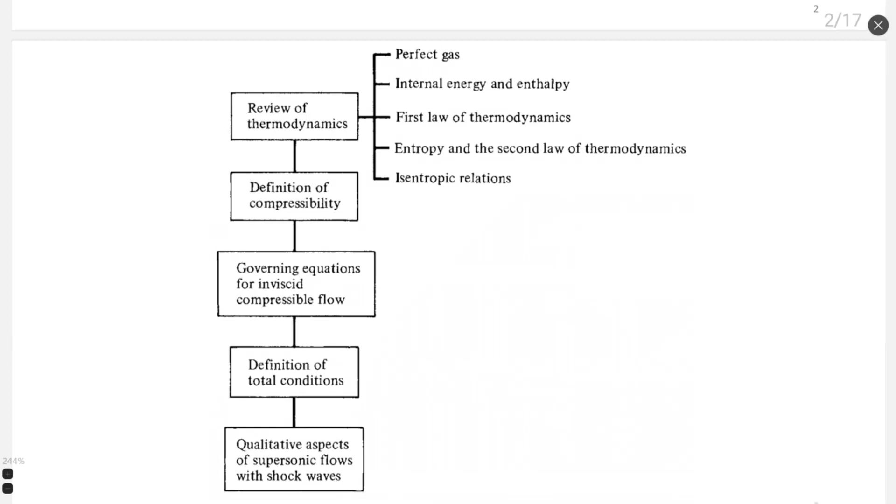Chapter 7 has this structure, as I show you on my screen: a review of thermodynamic properties, talking about perfect gas, internal energy and enthalpy, first law of thermodynamics, entropy, second law of thermodynamics, and isentropic relations. Usually I skip this part since it's part of your previous studies in other disciplines like transport phenomena and fluid mechanics. I will just give you a few very important relations which we will constantly use in our lectures, studies, and calculations.

Then will be a definition of compressibility, which is the classical definition. Then we talk about the definition of total or stagnation conditions for compressible flow, and then some qualitative aspects of supersonic flows with shock waves. We give a preliminary introduction to what shock waves are, which processes happen at these shock waves, and the different types of shock waves.

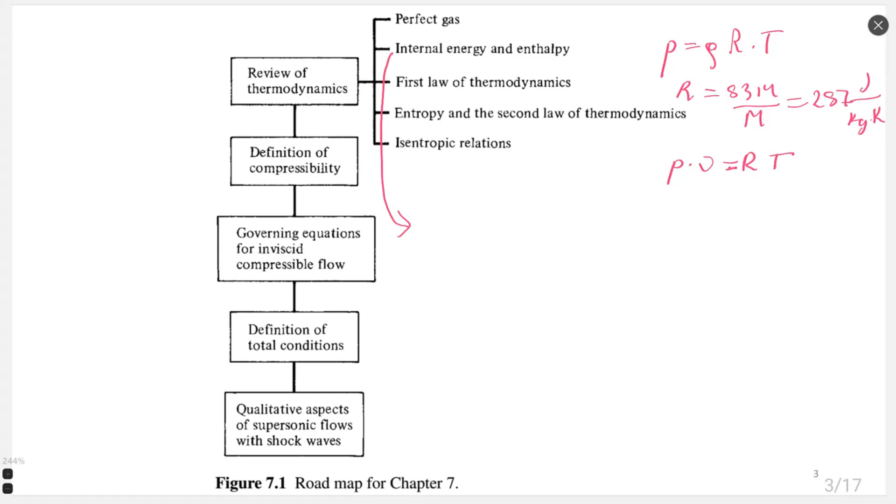This is about perfect gas, the most important thing, but you probably already knew it. Then for internal energy and enthalpy, we use the definition of internal energy: internal energy E equals Cv multiplied by T, where Cv is the specific heat of the gas at constant volume, and T is temperature. Enthalpy H is very similar, but it's Cp multiplied by T, where Cp is the specific heat at constant pressure multiplied by the temperature. So these are the two parameters we are using.

Between Cp and Cv, we also have a relation. I hope you remember, but if not, I'll remind you: Cp is always bigger, and Cp minus Cv equals the gas constant R. There is also another relation to the adiabatic coefficient.

Cp divided by Cv is gamma, the adiabatic coefficient. For air, this adiabatic coefficient equals 1.4. This is constant for low temperatures, until approximately 1500 Kelvin. After 1500 Kelvin, when we usually start to have processes of dissociation, recombination, or hypersonic flow, this gamma starts to change, and change significantly. We will discuss this question in one of the following chapters when we talk about hypersonic flow.

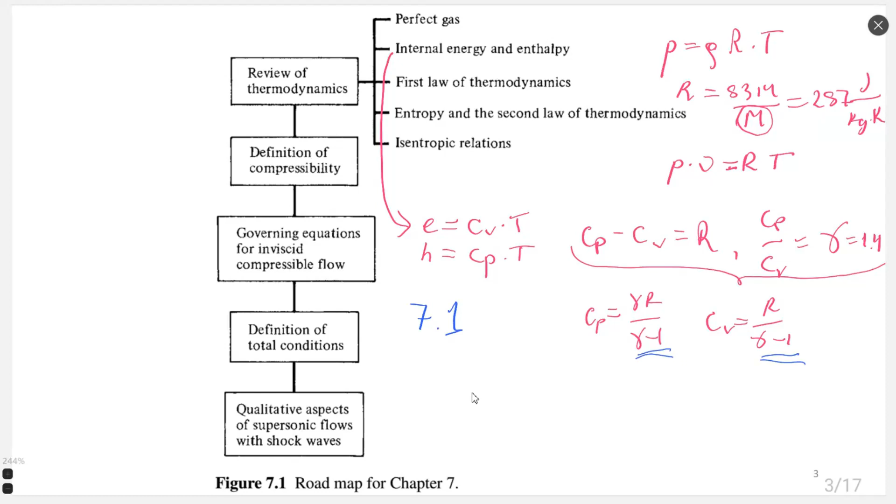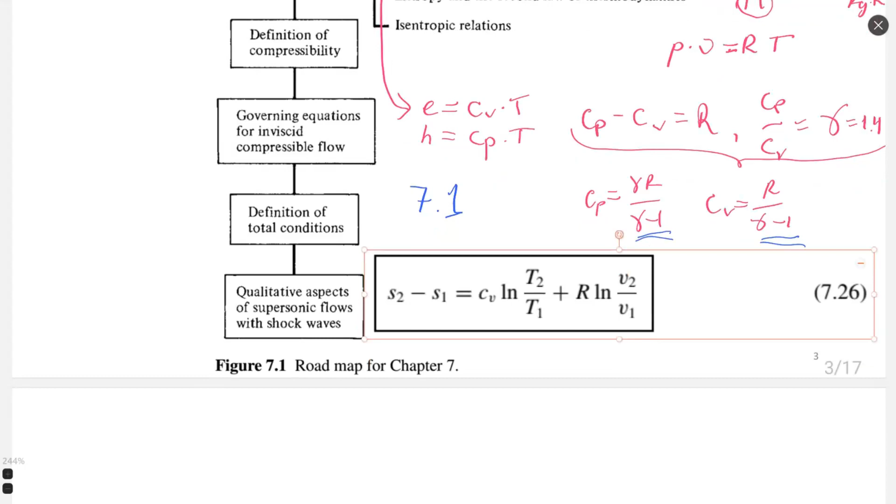I will show you this equation right now. This equation right here. Okay, I hope it is visible. I think some pictures or equations I will just drop on the screen because it's much simpler to do it this way than to write long relations, and then we can discuss other things.

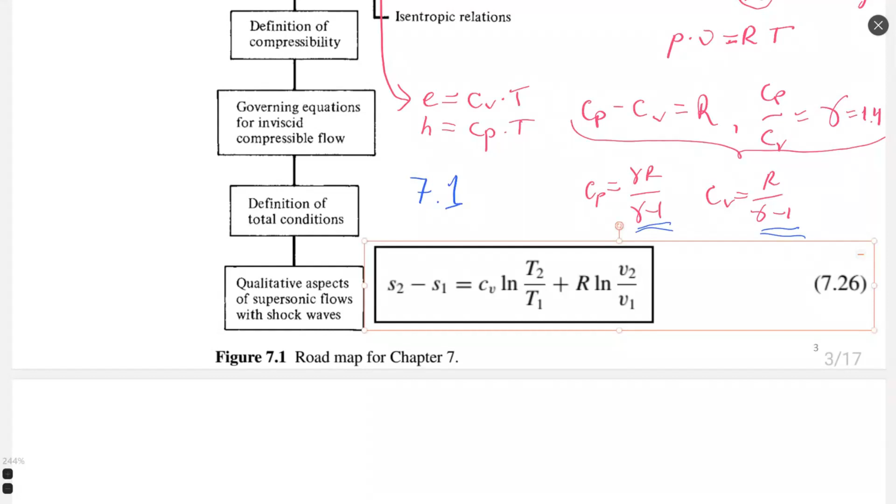As a consequence of isentropic relations, we have ratios between different thermodynamic properties inside the gas. I hope you know the main isentropic relation.

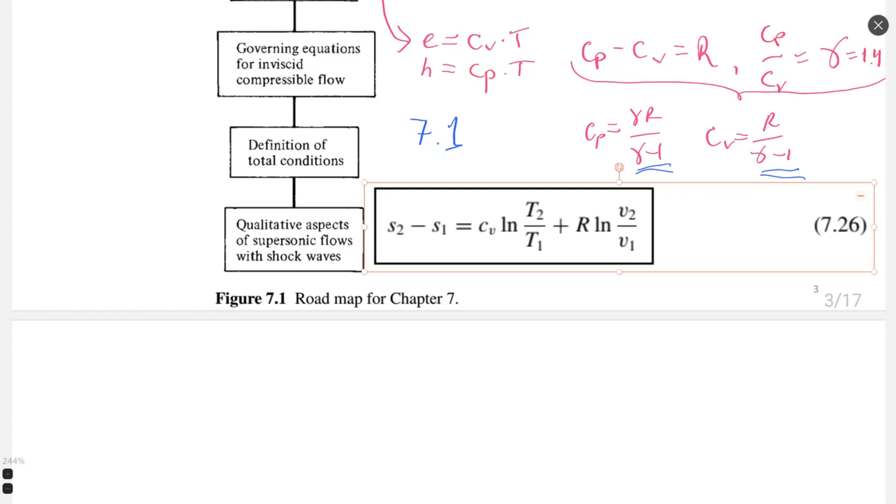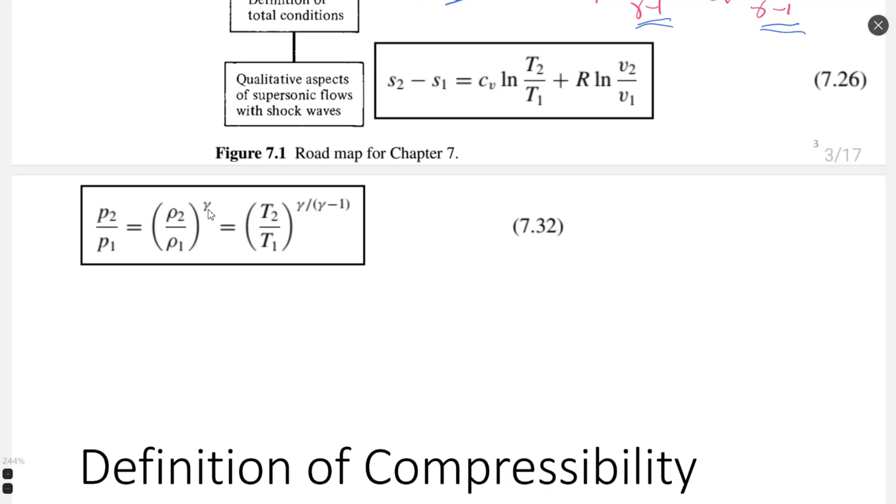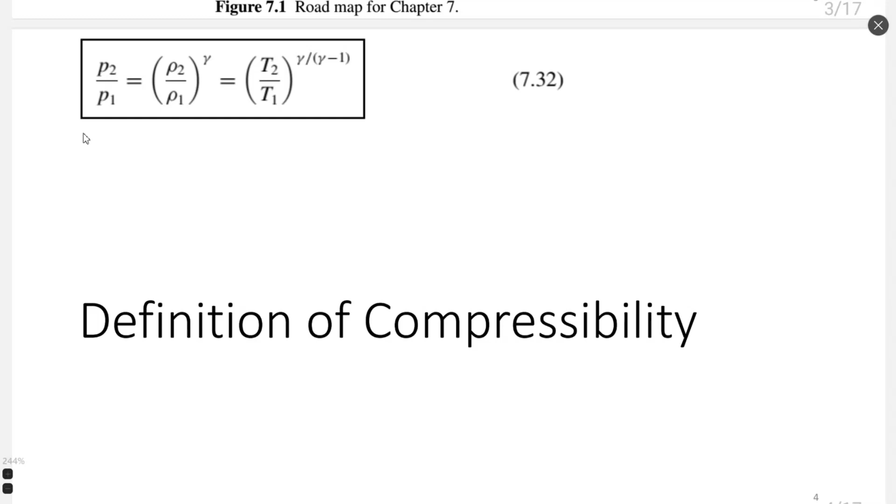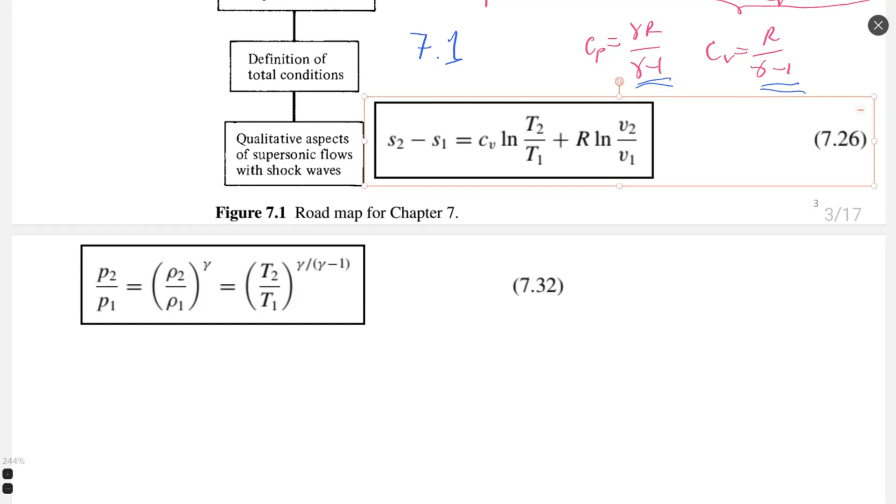Okay, probably before the definition of compressibility, I will put it right here. This relation corresponds to equation 7.32, which talks about the change of thermodynamic properties at different points inside an isentropic flow. Isentropic flow is a flow which has zero change of entropy. This is the formula which gives us the change of entropy, equation 7.26, and if this is zero, then isentropic relations start to work.

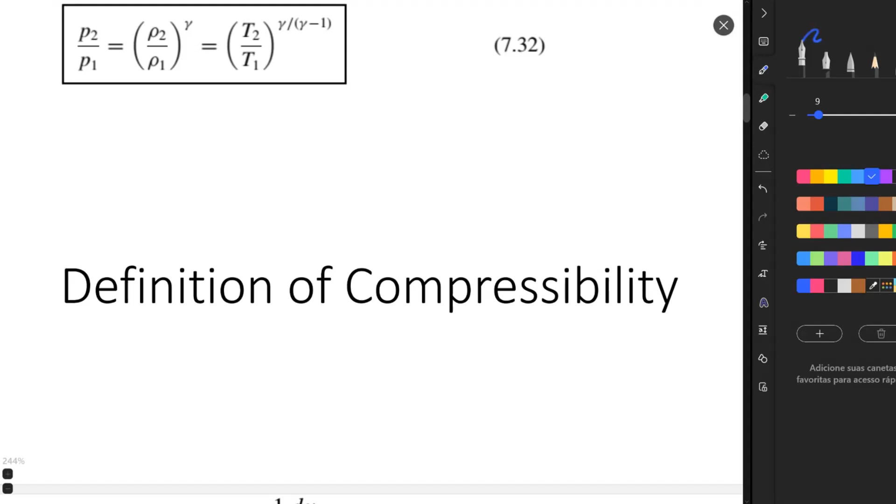It says that at two different points, for example, the ratio of pressure would be equal to the ratio of densities raised to the power of gamma, or equal to the ratio of temperatures raised to the power of gamma divided by gamma minus 1.

Also, we may find here this gamma minus 1 is present, so this ratio is always positive. And look what we also can find from this relation. Probably you already know that since pressure 2 is bigger than pressure 1, it means density 2 will be also bigger than density 1, and temperature 2 will be bigger than temperature 1. So all thermodynamic parameters usually change in the same direction inside isentropic flow.

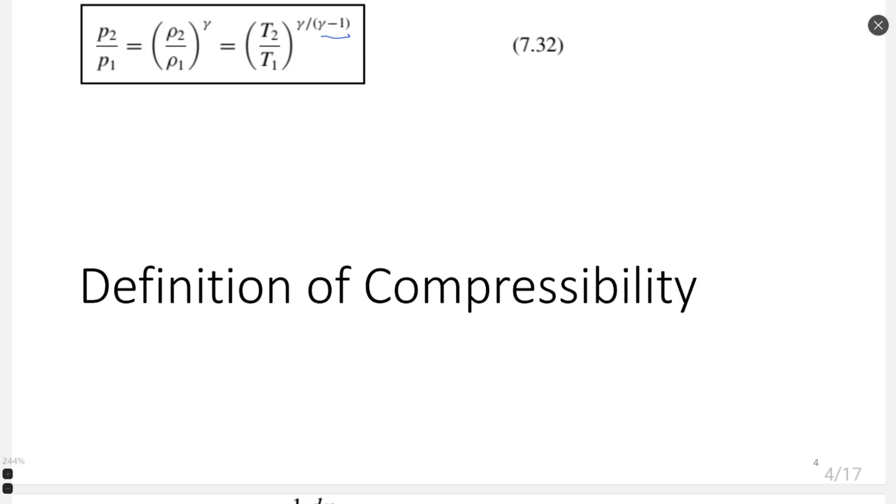We will see this soon when we talk about flow in the nozzle and calculation of the flow in the nozzle. There you will see similar changes of pressure, density and temperature inside the nozzle, which is quite important to understand from the beginning before we start the nozzle section.

Examples 7.4 and 7.5 give us another possibility to calculate change of thermodynamic properties according to the relation I just showed you. I think you can check those.

And the main definition of compressibility is shown on this screen. Definition of compressibility is very important, and as I already told you, for fast flows, the coefficient of compressibility is called tau, which is reverse proportional to the specific volume and proportional to the derivative of specific volume by pressure.

This compressibility coefficient can be defined for the arbitrary case as shown in equation 733, or defined for isothermal process as the isothermal compressibility coefficient, tau T, or even calculated as the isentropic compressibility coefficient, tau S. In the first case, we have the partial derivative of specific volume by pressure at constant temperature, and for the second case, specific volume derivative by pressure at constant entropy.

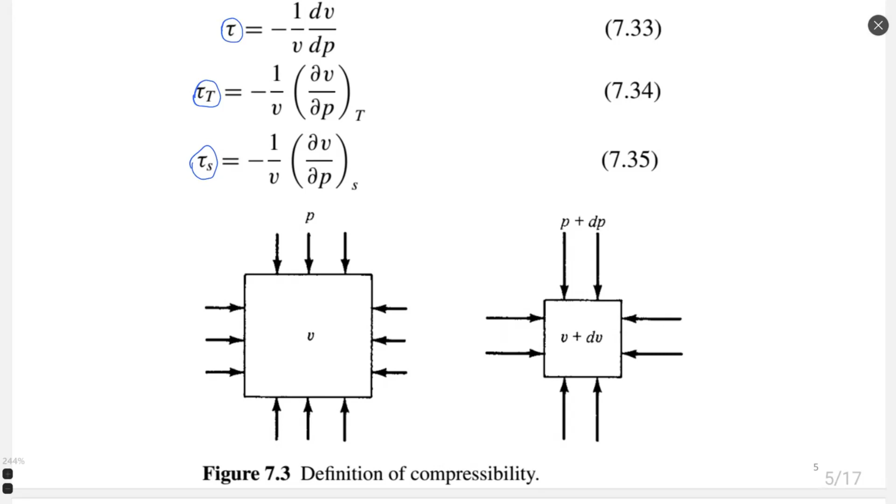So the schematic at figure 7.3 shows change of the volume and change of the pressure, because change of the volume can be caused only by change of pressure.

Another formula you may find in the book is mainly a transformation equation. 737 is a reorganization if we would like to obtain the differential of density as a function of density, the compressibility coefficient, and the differential of pressure. It's just a rearrangement of equation 36.

And another equation we may see is the definition of Mach number, which is velocity divided by the speed of sound. Why we actually use the definition of Mach number, we will see very soon. For us, Mach number, or the relative velocity of the flow to the speed of sound, characterizes the kinetic energy of the flow.

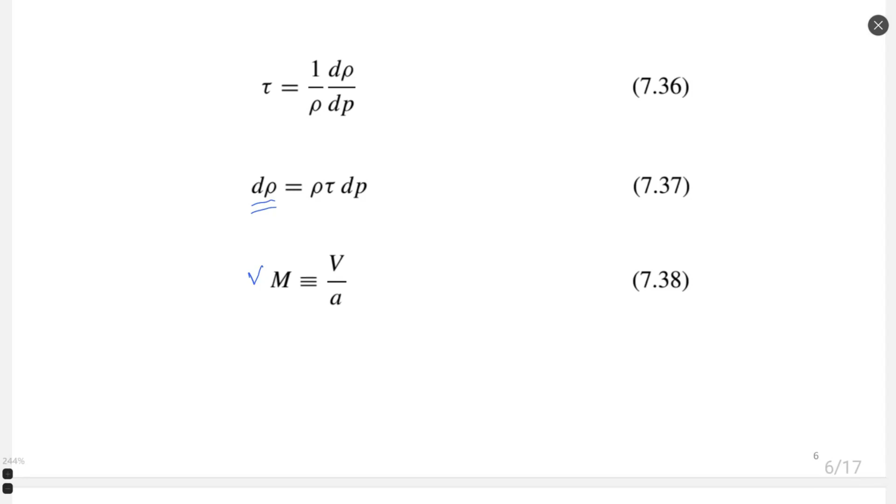Till now I see no questions, so I can proceed to the equations for inviscid compressible flow. These equations you saw many times. Probably I will stop on some aspects which we are discussing in following chapters.

I would like to remind you that Anderson already presented the general equations of flow in the book, and you also studied these equations in other books, right? They are typical flow equations that can also be called the Euler equation system or Euler equations.

And these equations do not have a viscous part, so they are inviscid equations. These equations have the time part, the time derivative, so they are transient equations, not stationary. So something we preserve.

Equations of the flow can be written in general in two different forms: integral form, like equation 39, and derivative form, which is equation 40. What is the difference between them? It is how we try to calculate the flow process.

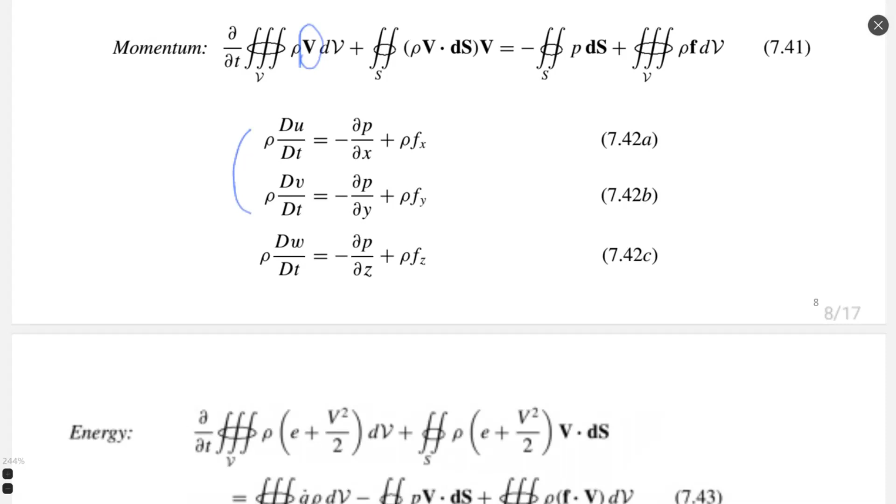The energy equation is the most complex equation among all flow equations because it uses the definition of energy, and energy is not defined as one parameter. Energy can be kept inside kinetic part and potential part. The kinetic part is hidden inside velocity, so we can see it in several parts of this equation. The potential part of energy is hidden inside the temperature, and we also can see internal energy in different parts of this equation.

The idea of the energy equation is similar to the previous equations. It says that energy does not go anywhere and does not appear from anywhere. Energy only transforms from one form to another. Here we have a global energy balance in time, change of energy in time inside the control volume, and here we have how energy flows through the surface of the control volume.

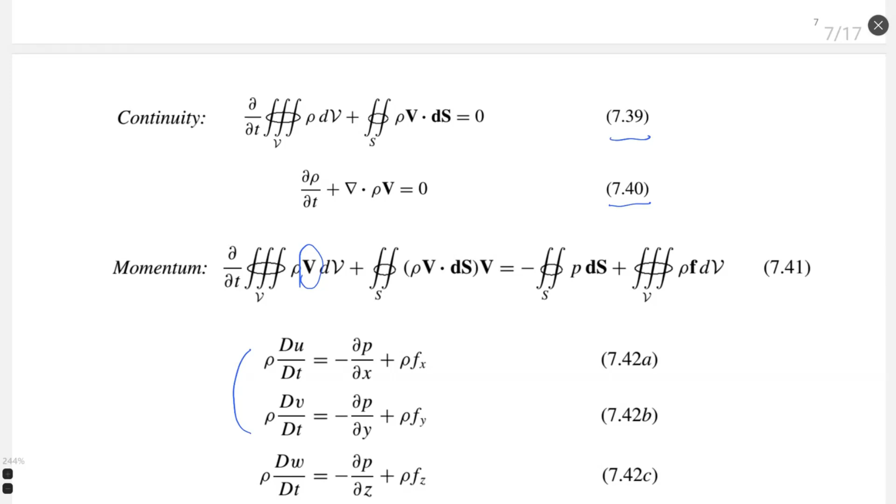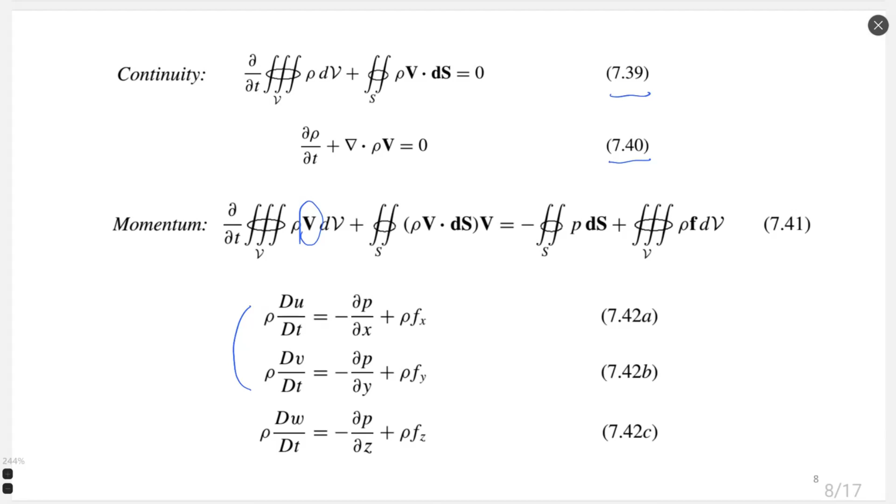Let's see, we had three equations, right? The continuity equation, which has inside it density and velocity, two parameters. The momentum equation has density, velocity, but also pressure, already a third parameter. So with two equations we already have three independent parameters. The energy equation has, despite density, velocity, and pressure, internal energy, and inside this internal energy is temperature. So many parameters, more than the number of equations.

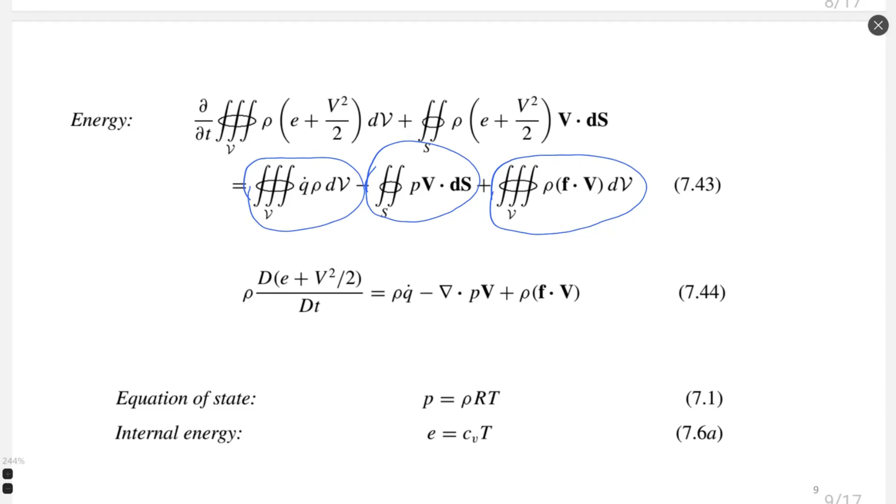This is why, to close the equation system, to complete the equation system, we need two more additional equations: the equation of state and the internal energy equation. In such a way, the number of unknowns is equal to the number of equations, and this equation system can be solved. It's quite important for us, for applied science like gas dynamics, to have an equation system which can be solved, which we need to solve.

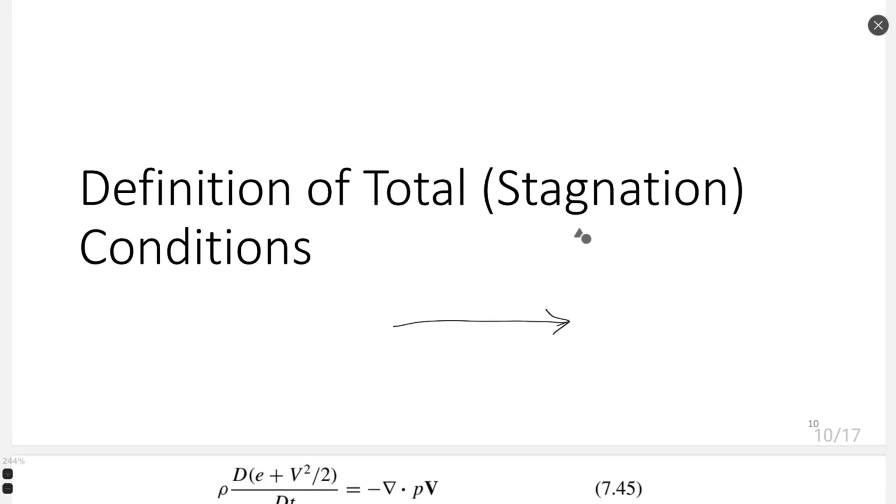But if we have a flow, at some point there will be a wall, and on this wall, flow will stop. What will happen in the real case is the following: flow will go in two different directions, but at the very central point, the flow will stop. So when we had V infinity here, at this point, we will have V equal to 0. Velocity will be 0. Flow will not move. All the kinetic energy from infinite distance will transform to potential energy.

It's very important to us to calculate properties at this specific point where flow is stopped. It is not only to know how big would be the pressure, density, and temperature. There are even examples when flow does not stop, we will see them, for example, inside the nozzle or inside the diffuser. Flow doesn't stop, but we need to calculate stagnation conditions because stagnation properties are characteristic properties of one or another structure. Even by definition of stagnation parameters, we can calculate efficiency of one or another structure. So let's see this question precisely.

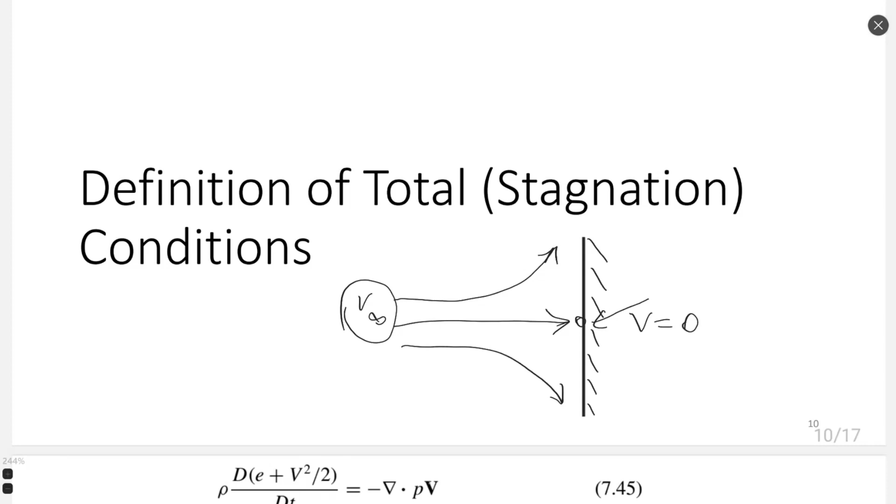How to calculate stagnation conditions? We need to see again our energy equation 45, and inside this equation we will rewrite the right part on the pressure contribution. According to the formula which gives us the derivative of a complex function, we can see that the derivative of the product of pressure and velocity would be this relation. Then we go back to our energy equation, make some transformations, and obtain a very important relation.

For the flow, this sum of enthalpy and velocity squared divided by 2 would be constant. Constant because the right part of the equation is 0. So inside the derivative, we need to also have the derivative equal to 0, meaning inside the derivative we have a constant parameter. To remind you, this part here is enthalpy: internal energy plus pressure divided by density is equal to enthalpy.

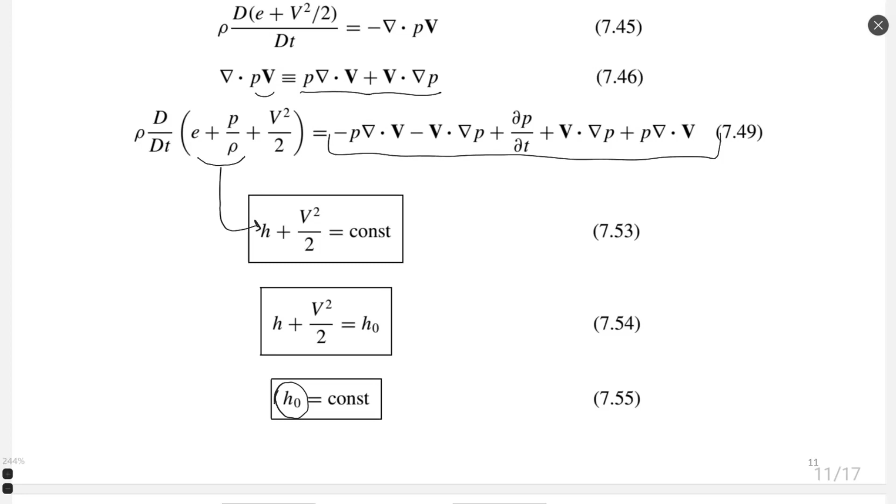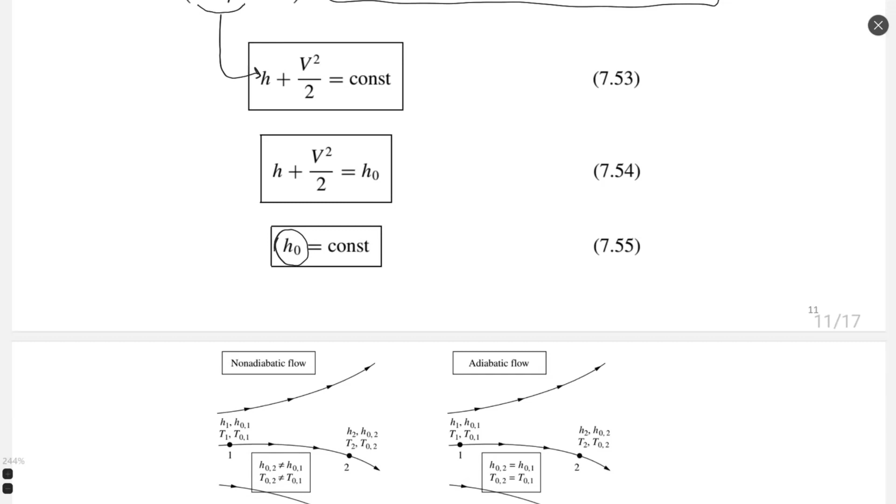We call this constant the stagnation enthalpy. So the stagnation enthalpy is constant for isentropic flow. It may be not only isentropic flow. This is the main parameter, or property of the flow, we will use to estimate stagnation conditions. So we are looking at the stopped flow as a flow with constant enthalpy, which is the maximum possible enthalpy for the system.

We may find 4 different types of flows, as you already know. They are non-adiabatic flow, when we have processes that account for heat transfer with the wall or with some external bodies, or adiabatic flow, the second case, where we assume that inside our flow we do not have heat exchange with external bodies or bodies inside our system. In such a case, stagnation enthalpy is preserved.

Since stagnation enthalpy is proportional to stagnation temperature, just to remind you, enthalpy was given previously as Cp multiplied by T. So if I write 0 right here, and then I can write 0 right here, nothing changes, because Cp is constant. It means that if for some adiabatic flow the enthalpy does not change, then stagnation enthalpy does not change, and stagnation temperature also stays constant. This is a very nice observation that helps us use different forms of energy equations, which we will see soon.

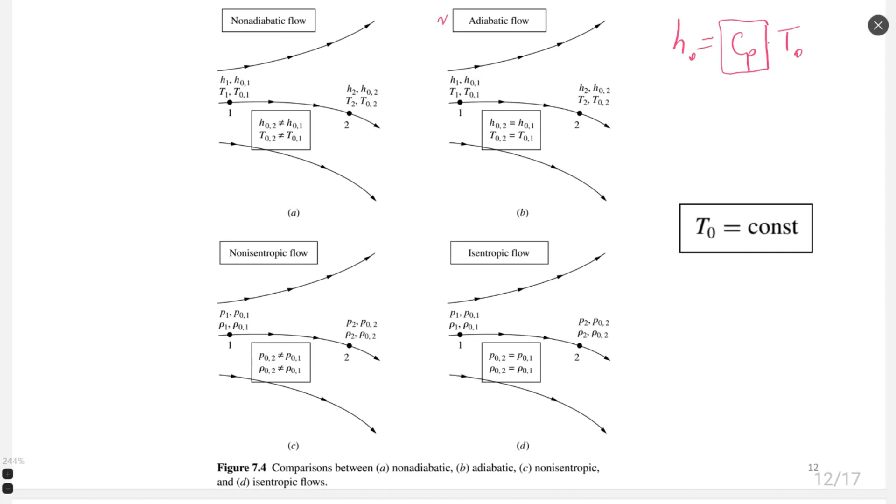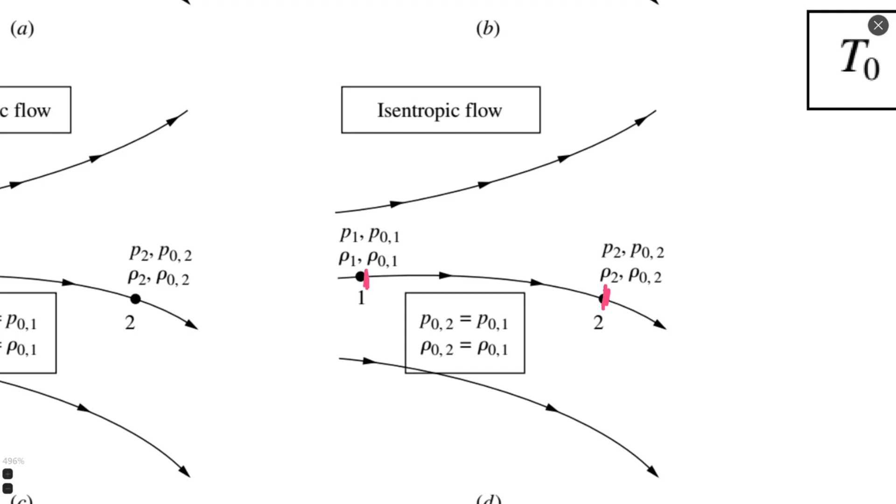What is stagnation pressure? Stagnation pressure is the pressure which we have when the flow stops. So if we stop the flow at point 1, we receive some stagnation pressure. If we stop the flow at point 2, we receive another stagnation pressure. For isentropic flow, these two stagnation pressures will be the same, and also the stagnation densities will be the same. Stagnation density is the density that happens when flow stops. So we have stagnation pressure, stagnation density, stagnation temperature, and stagnation enthalpy. This word 'stagnation' can be written in front of any thermodynamic parameter.

And the opposite is non-isentropic flow, where we have irreversible flow. In this case, unfortunately, stagnation pressure cannot be conserved, stagnation density cannot be conserved, and this is one of the questions to be solved inside theory of normal and oblique shock waves.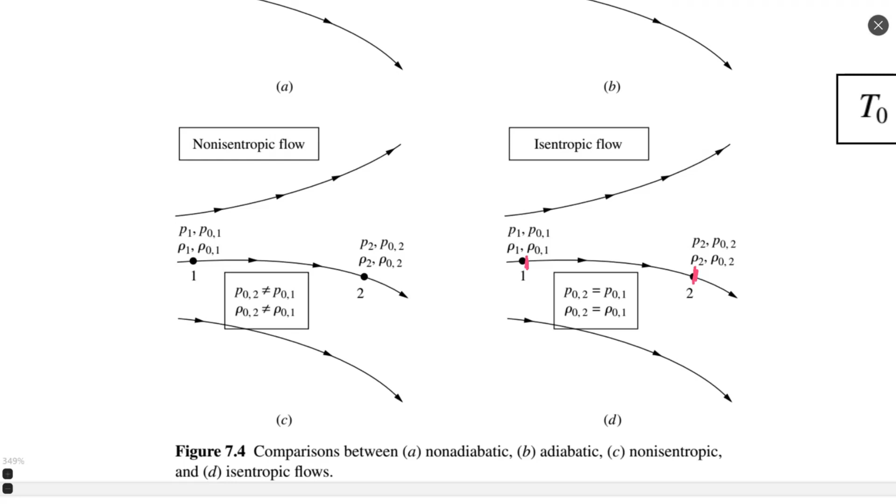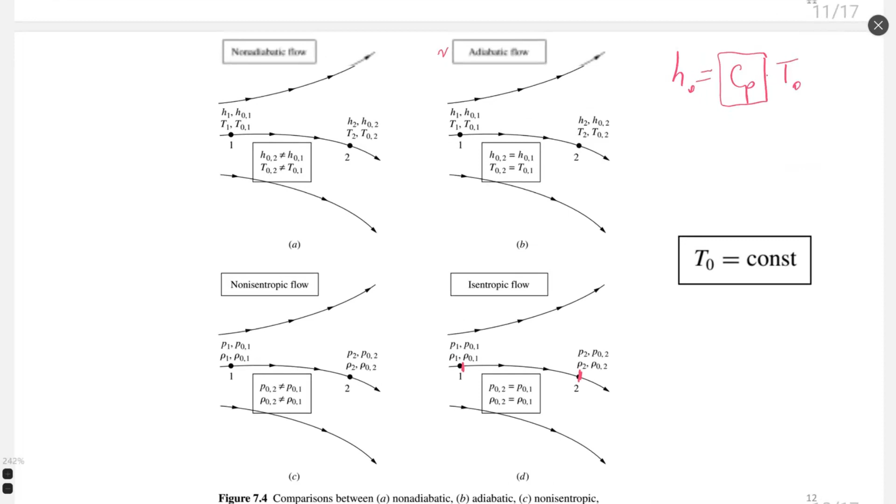It's solved analytically, and also in case of hypersonic flows, unfortunately it cannot be solved analytically—it can be solved only experimentally or numerically, with big difficulties. So this is a revision of 4 main types of flows.

Of course, from point of view of calculation, it's always favorable or more interesting for us to have isentropic flow, because it allows us to calculate quite easily almost any type of geometry of the flow. In some cases, adiabatic flows are very nice because with the assumption that we have no heat transfer, the model is not so complicated.

As I already told you, non-isentropic flow is probably the most difficult from a computational point of view in some cases, but in some cases, as we will see, an analytical solution can be obtained, and we will use it particularly inside work 1.

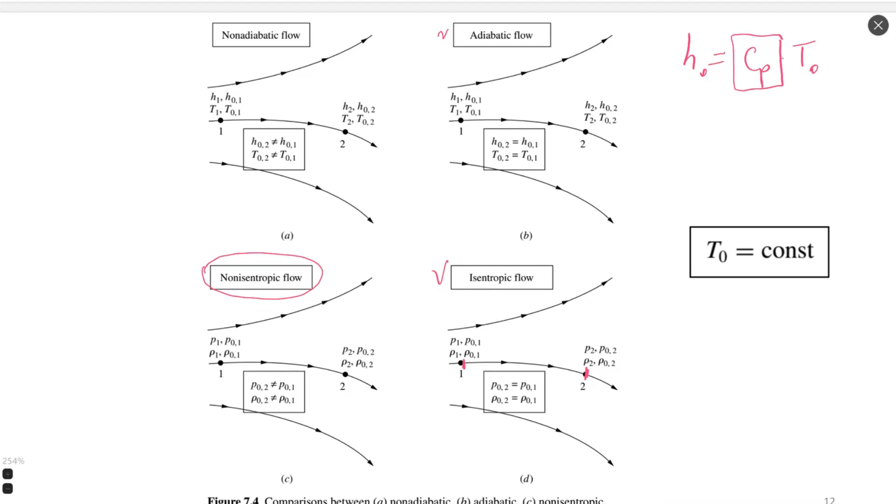Okay, I do not see any questions for now, and I think we can proceed.

Inside example 7.6, you may find how to calculate total temperature from other known parameters of the flow. This question we will also touch on in the next discussions, because when we see the algebraic equations for isentropic flow, then we will talk about such calculations.

So we will not miss this equation, example 7.6 and 7.7. We will still return to this question, and I will show you how you can easily calculate isentropic parameters or stagnation parameters.

The last part of chapter 7 is aspects of supersonic flow and shock waves. Just a moment, let me take a look if I did not miss anything. No, looks like we discussed all that is required. Chapter 7 is quite short, and we will finish today. Next time, we will start already chapter 8.

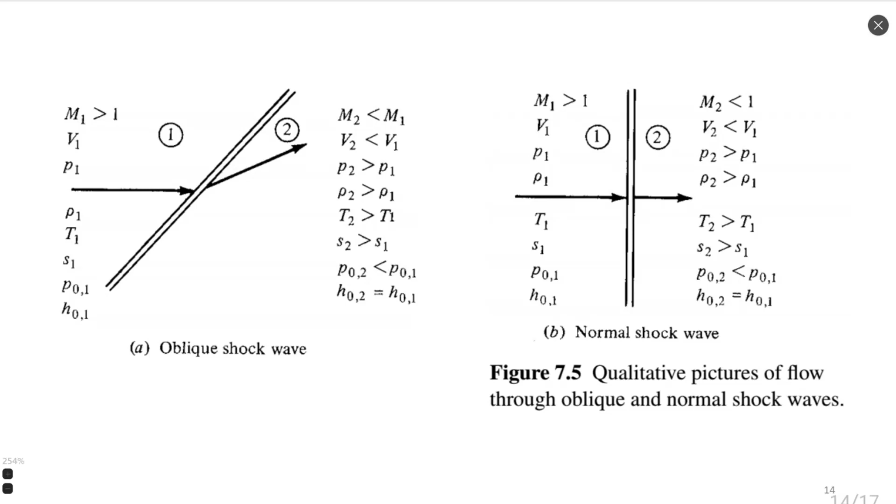Let's see—oblique shock wave is usually generated when we have a body not normal to the flow. For example, we have some thin shaped body. I will try to draw it, probably like this. Okay, we have a body, something like this. Some aerodynamic supersonic flow requires sharp edges. For example, we have this kind of airfoil, quite exaggerated in thickness, just to show you that a sharp edge generates the oblique shock wave.

Oblique shock wave is a shock wave which is not perpendicular to the flow. Normal shock wave is a shock wave which is perpendicular to the flow. Normal shock wave can be generated when the surface of the body is also normal—for example, we have some spherical or semi-spherical object with the surface quite normal to the flow. So this normal surface will create such disturbances inside the flow that it will generate a shock wave perpendicular to the main flow direction.

More details about which type of shock wave exists we will speak about respectively in the normal shock wave section and in the oblique shock wave section. We will see that for an oblique shock wave, several different conditions must be satisfied for it to appear. It's not just about having a sharp body and supersonic flow—no, we need to satisfy several conditions, and all of them can result in an oblique shock wave. Otherwise, they can result in a normal shock wave or in a bow shock wave, which we will see in some of the next lectures.

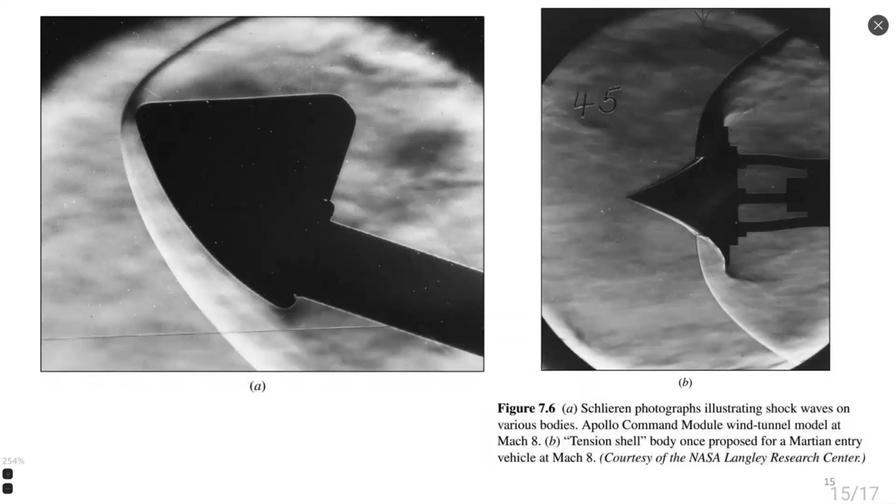Let me see which things we still need to discuss. These photos prove theoretical models - this is the photo of the bow shockwave.

Usually shockwaves cannot be just as simple as I showed you on the previous slide, but as I told you, they can be of a complex shape. Shape of the shockwave is strictly related to various factors. Main of them are Mach number before the shockwave and the shape of the body. More complex shape of the body, more complex will be the shape of the shockwave, but it will never repeat proportionally, nothing like this.

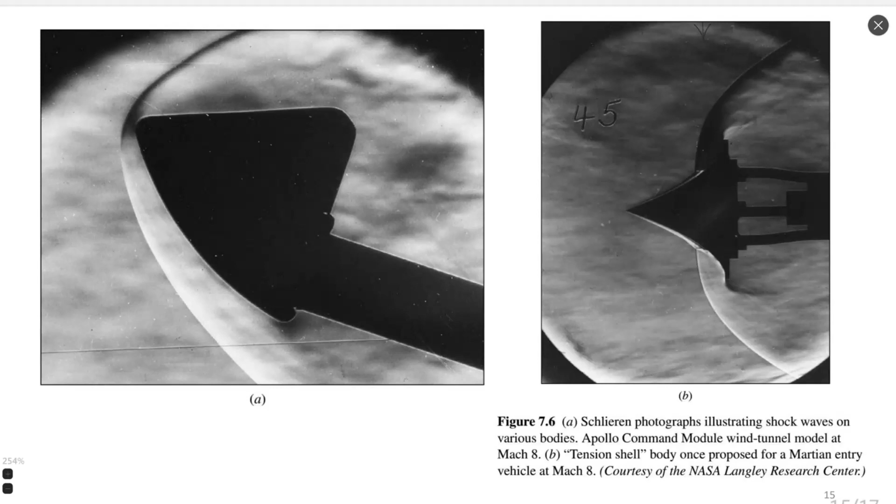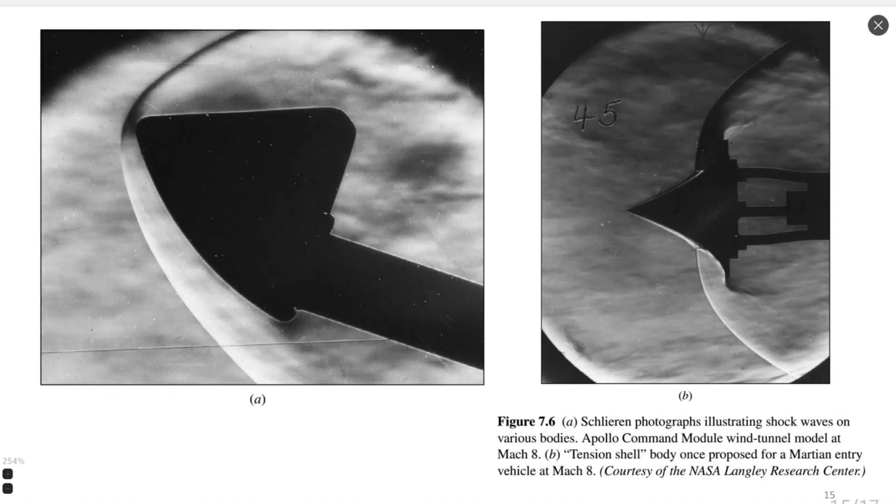Shockwave and compressible flow are highly nonlinear processes. It means that the flow cannot be described by any kind of simple equation. Especially such complex shockwave, which we see on the screen, can be obtained only experimentally. And if we are very lucky and very good in numerical simulation, we can obtain them numerically.

Here I want to show you this part B of the picture. You can see that shockwave distance is very small to the body. This is telling us that the shape is very important. In some shapes that we will discuss in gas dynamics, shockwave will never even exist. Such shapes are perfect aerodynamic bodies that are called isentropic bodies, or isentropic nozzles, or isentropic supersonic diffusers.

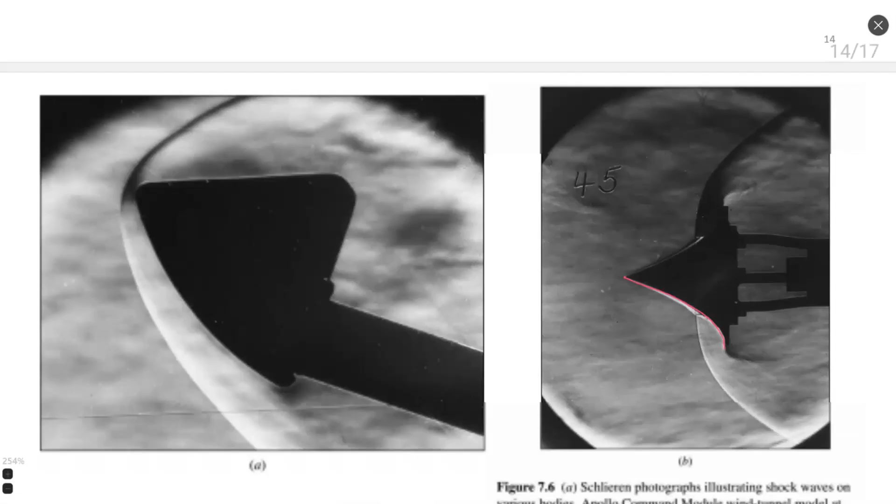In such structures, shockwaves do not happen, or they happen in such a way that they are infinitesimally weak, very weak. Why don't I like shockwaves? It doesn't mean that I do not like shockwaves. Shockwave is not very good for the aerodynamic structure, but in many cases, shockwave is the only way to have flow in the structure. For example, if you have a supersonic - sorry, my screen turned off.

I will start again. In some cases, when we need to have flow decelerate, for example, to decelerate from supersonic to subsonic, there is no way not to have a shockwave. In other cases, there is a way - we will discuss it in the section of nozzles and supersonic diffusers. Okay, my screen already appeared, let me share.

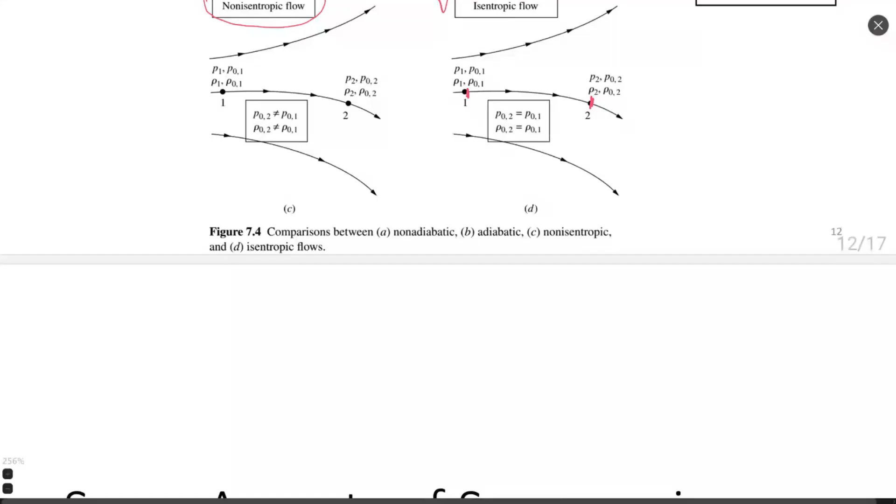Shockwave by itself, from the performance of aerodynamic processes, is not a good thing. We always try to avoid shockwave, or to make it as weak as possible, because shockwave reduces the energy of the system. Increasing the entropy, we may significantly reduce the global energy balance, and some structures will not fly.

For example, this is critical when we are trying to create a scramjet engine, which flies at very high velocity, or a hypersonic engine. Scramjet is the engine which allows flying at hypersonic speeds. I think recently Brazil tested one of such engines inside one of the projects of military applications.

We're always trying to reduce the strength of the shockwave. As fast as we would like to fly, the more we need to work on making more performant geometry or regime of the flow. Only such measures will allow us to have losses at a level that allows us to receive positive thrust and accelerate until some required velocity of the flow.

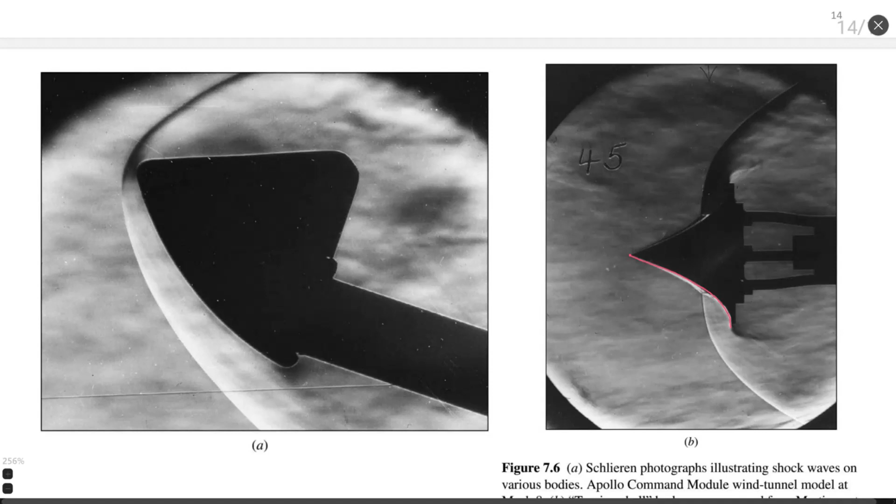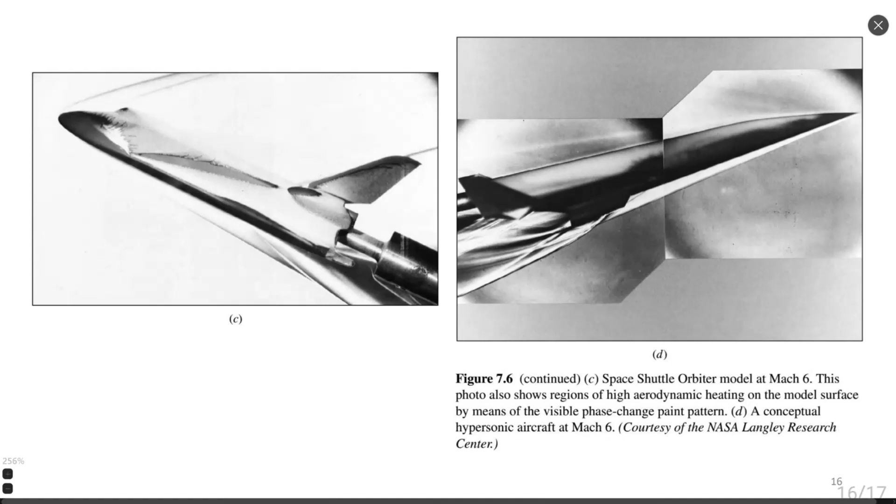Another visualization of shockwave is here - not so clear because they are quite old photos, also Schlieren photos. I especially like this space shuttle photo inside the aerodynamic tunnel, and you may see that one of the most important questions on the space shuttle design was the re-entry problem.

When we have hypersonic re-entry, temperature increases significantly, and in these conditions it's important to make a lot of calculations and experimental tests. Of course, you cannot launch a complete shuttle into space and see how it hits every time, like Elon Musk is doing. But in those times, one of the few possibilities was to test such a structure in the wind tunnel, a supersonic wind tunnel. Here, this color on the body represents heating of the model of the space shuttle. There are different paints that can be used, some that change color when you apply heat.

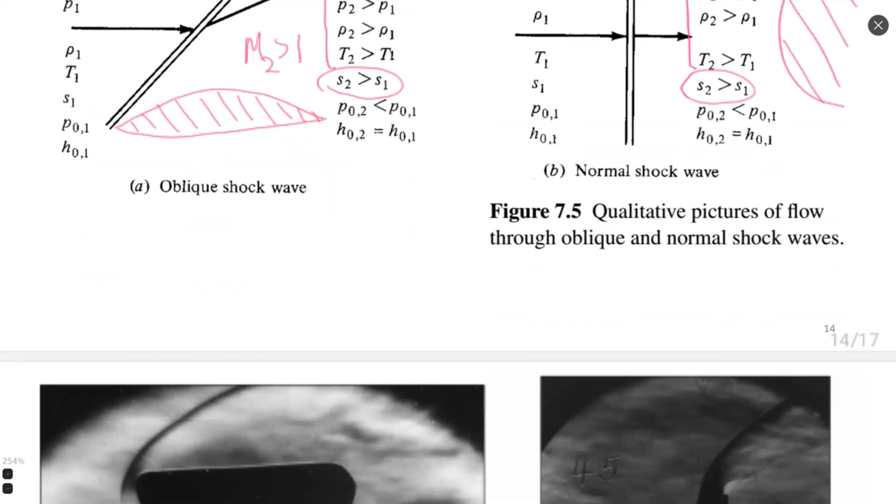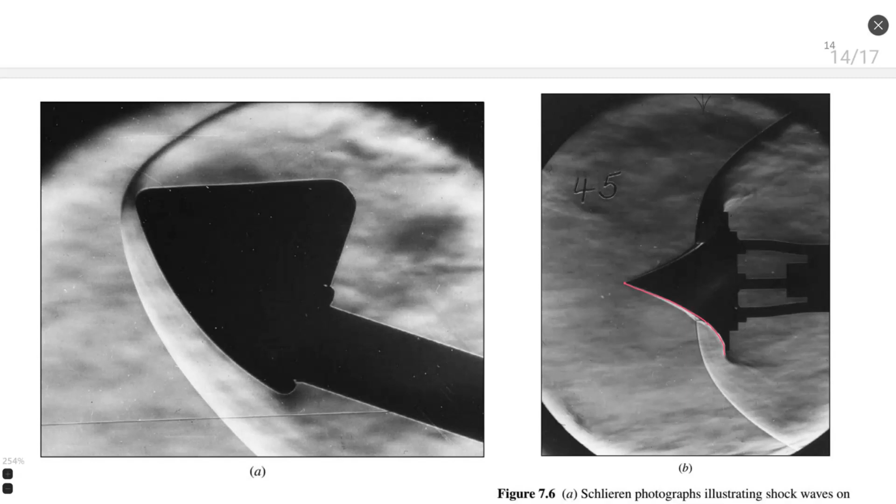And they depend, each point depends on many other points. For example, when you start to change the flow, these perturbations, these changes—say we have changes right here on this point—these changes will start to influence all points, and it means they can also influence the formation of the shockwave. So when we are looking at a shockwave of complex shape, we need to be more careful than just seeing it as a normal or oblique shockwave. It also has a relation to other points in space which we probably did not consider.

Então, por exemplo, essa análise dos parâmetros termodinâmicos e tal, a gente já não consegue fazer quando... I think with simplifications, we can try to do it, but every time we try to adopt one simplification or assumption, we need to be sure. So we need some validation. I think this is a fundamental aspect to validate the model, right? We cannot simplify so much, I think, but if we are working, for example, over a long distance, one point far from another, then theoretically the two points will not be so much connected. Of course, they will be connected, but not so much.

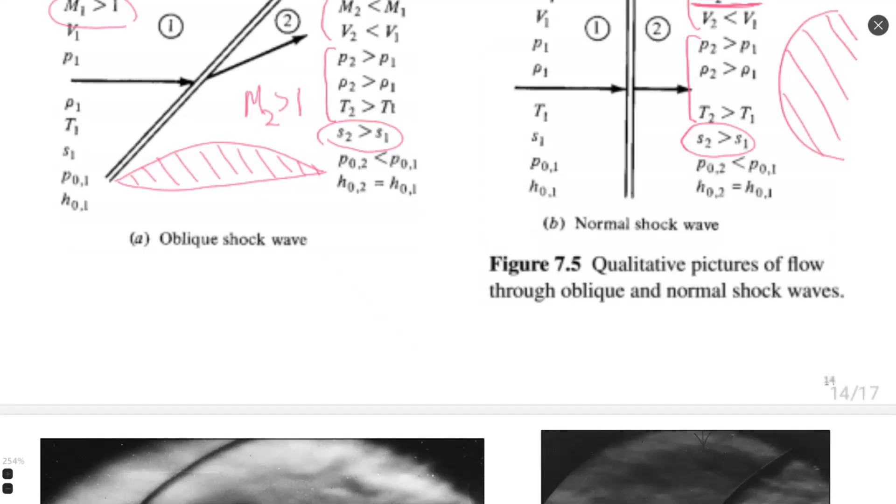But I hope in some cases we can do as you suggested. We can assume some parts of flow as normal and oblique shock waves. I hope. Yeah, sometimes it works, sometimes it doesn't work. We need to see each separate case. But thank you for your question.